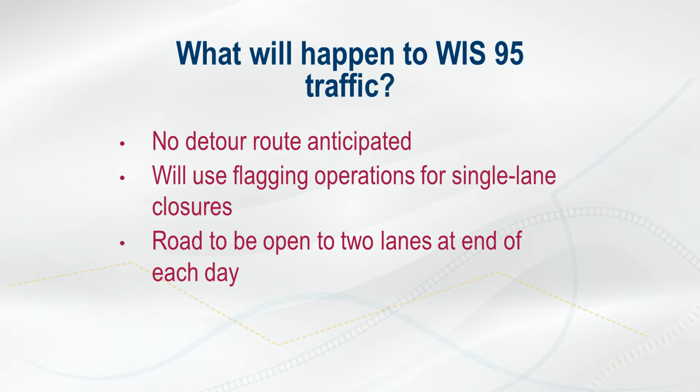Construction is anticipated to start in spring 2024. Wisconsin 95 will not be detoured for any period during the construction phase. Instead, the work will occur with single lane closures using flagging operations for paving and culvert replacements. Two lanes will be open at the end of each day.

The main reason this project is needed is the pavement condition along Wisconsin 95. The current pavement is deteriorating and has extensive alligator cracking, longitudinal and transverse cracking, pothole patching, and rutting. This pavement deterioration is unsightly, raises safety concerns, and causes Wisconsin 95 to have poor ride quality.

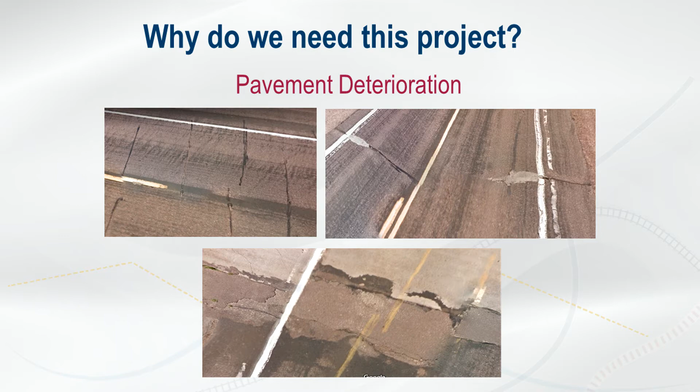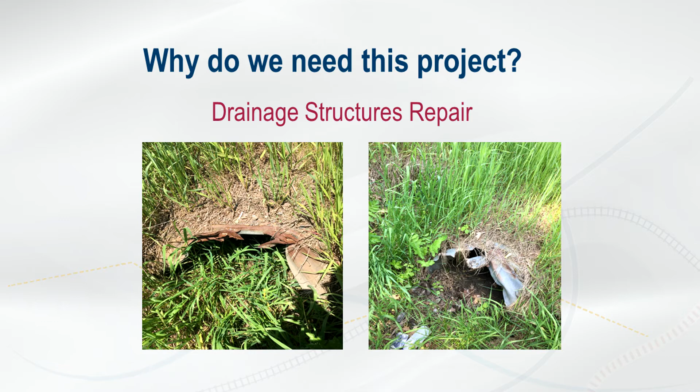This project also is needed because of the poor condition of culverts along Wisconsin 95. Within the project limits, there are numerous locations where culvert pipes are deteriorating and distressed and in need of replacement. There are several other locations throughout the project that will require culvert lining and culvert and ditch cleaning.

The final reason the project is needed is that the curb ramps located in the village of Hixton are not up to the Americans with Disabilities Act standards. These photos highlight the inadequacy of the curb ramps along Wisconsin 95.

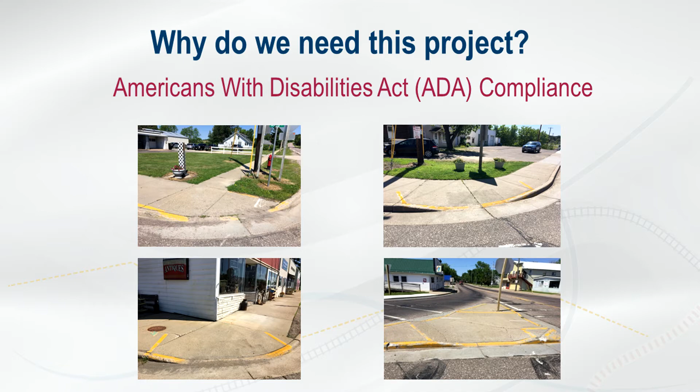Curb ramps will be upgraded at the intersection of Main and State Streets, as well as Park Drive, Hoffman Street, and Depot Street. The photos shown here are 4 examples of existing curb ramps that will be replaced as part of this project, including the island at the Main State intersection.

The proposed project includes resurfacing urban and rural sections of Wisconsin 95, upgrading the curb ramps, and replacing culvert and cattle passes, as well as ditch cleaning and pipelining where necessary. Guardrail also will be upgraded, pavement will be marked, and centerline rumble strips will be added.

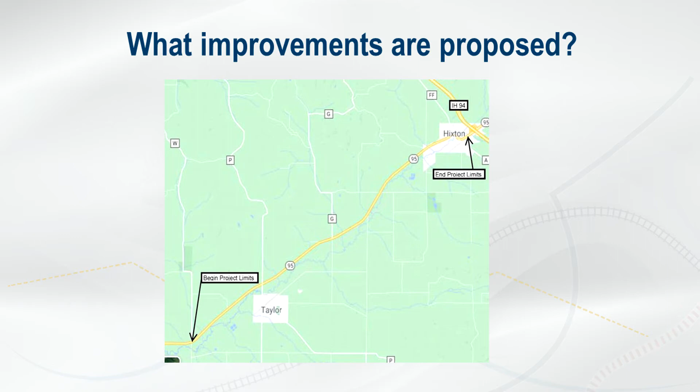The next collection of slides will explain each proposed improvement, first showing the typical sections of Wisconsin 95, second explaining the curb ramp improvements, and then touching on the proposed beam guard upgrades and culvert replacements.

In the urban section, 3 1/4 inches of the pavement will be milled off, and then 3 1/4 inches of new asphaltic material will be laid down. The limits for paving in the urban areas will be the existing curb and gutter, which will remain in place.

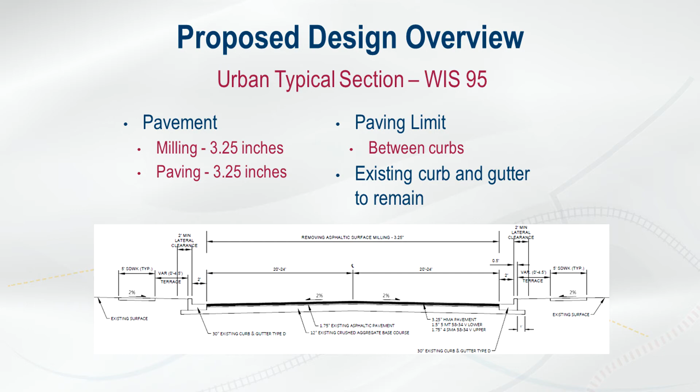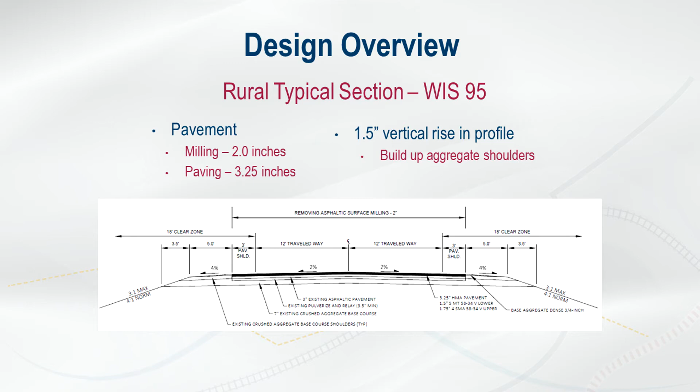In the rural section, the top 2 inches of existing asphalt surface will be milled off, and 3 1/4 inches of new asphalt will be put down. For only the rural portion of the project, the proposed vertical profile will be increased 1 1/2 inches.

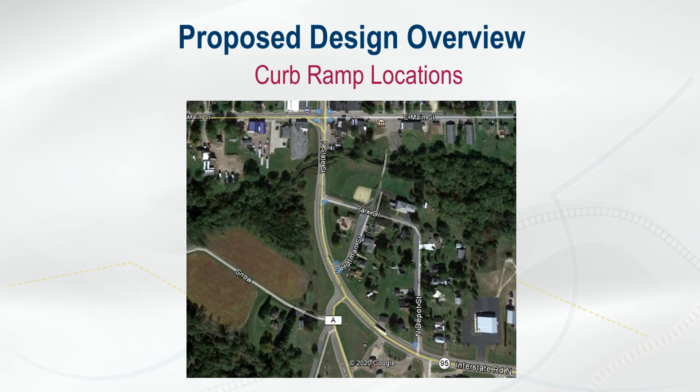Curb ramps will be realigned to provide the safest ramp that can feasibly be constructed with minimal impacts to the surrounding area. Curb ramps will be upgraded at the Main Street, State Street intersection and at Park Drive, South Hoffman Street, and North Depot Street.

Within the project limits, there are 2 locations where culvert pipes are deteriorating and distressed, and 1 location where a cattle pass is in need of replacement. There's an additional cattle pass that may be replaced with an equivalent culvert pending the owner's approval.

All culvert replacements will be done in kind using corrugated steel pipes. There are several other locations throughout the project that will require pipe lining and ditch cleaning.

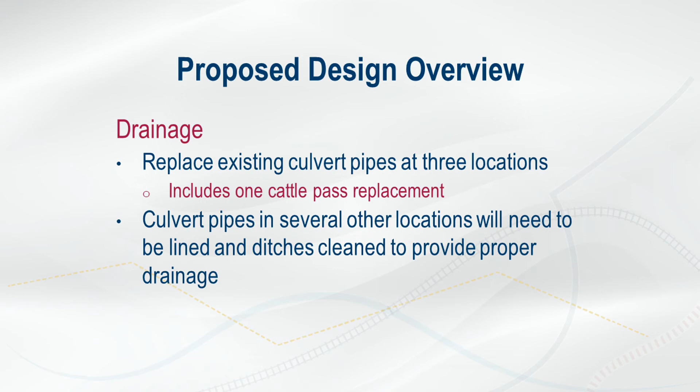Additionally, part of the project will include replacing all existing beam guard with an MGS system to fulfill the length of need calculations. There are 4 locations at existing bridges and 2 locations protecting existing culvert pipes and steep slopes that will require beam guard upgrades.

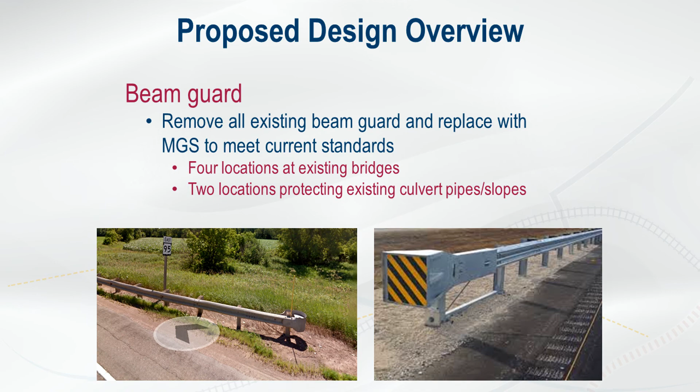At all structure locations, the components of the proposed beam guard will include MGS Thrie Beam, MGS Guardrail 3, and MGS Guardrail Terminal EAT. There are some locations where the proposed beam guard lengths extend farther than what is existing, which may require coordination with landowners regarding field entrances or driveways.

Preliminary design began in April 2019. The preliminary design and environmental process is to be completed in October 2020. Final design will begin in January 2021. Final plans are due in May 2023, and construction is expected to begin in April 2024.

Thank you for taking the time to watch this presentation. If you have any comments, questions, or concerns about this project, please send us an email, give us a call, or send us mail at the Wisconsin Department of Transportation Northwest Region Office in Eau Claire.